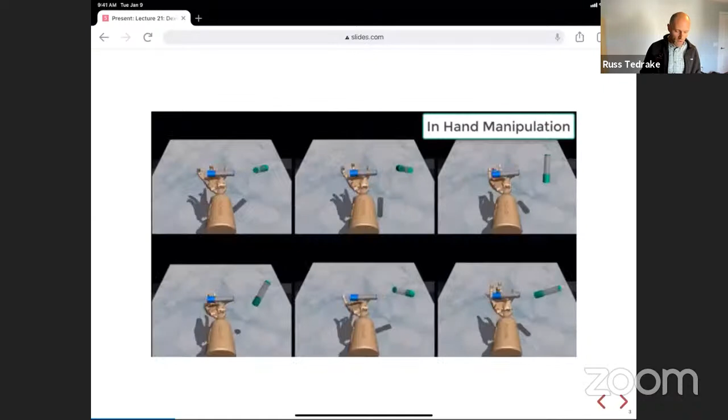This is the Adroit hand, from Mujoco. This is one of my favorite examples, where they're doing some pretty complicated tasks, like picking up the hammer. In this paper, they recommended a handful of these tasks as benchmark tasks for dexterous manipulation. I think the ability to simulate and control a full complicated dexterous hand is still an open problem. The fact that they can do as much as they did in this paper is absolutely awesome. But we still have a ways to go to make real robots that someone would actually choose to use a big, complicated dexterous hand on their robot. There are reasons you'd pay that price in complexity and cost if you could do more tasks, but we haven't completely solved the problem yet.

I like to put in some of the history, right, so it's not a new thing. This is Ken Salisbury, who did this I think just before he came to MIT, but this robot was upstairs at MIT for a long time when Ken was here. You should look at his biography, it's just awesome, the number of things he's done and been involved with, maybe after the lecture. But there's a link there that you could open up and set aside.

But this is, like, you just watch what this thing's doing. This is choreographed, of course, it's not solving the planning and control problem, but that's a hand from 1982 doing bottle twisting and everything, right? It's absolutely incredible. And if you were to look at the side view of the hand, it's got motors, a bank of motors off to the side, and it's cable driven. But just absolutely beautiful, stunning hardware. How many years ago? Almost 40 years ago, right? So it's hard to blame the hardware for why we haven't done better.

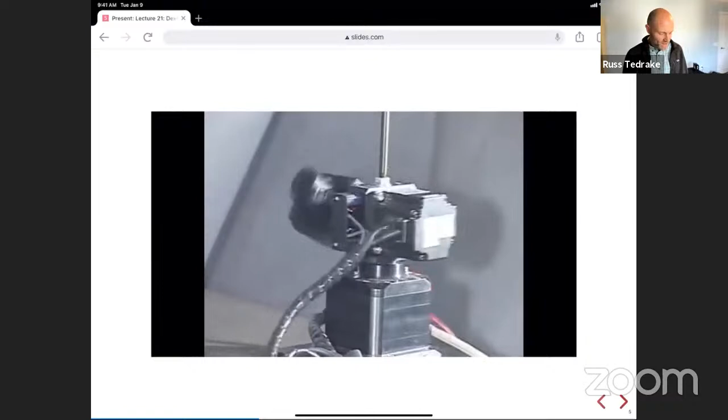I showed you this in one of the first lectures, but it's my favorite robot ever. This is the high-speed hand from Ishikawa. Whenever anybody at a conference asks me what's my favorite robot, and I have to put it on my name tag, I always pick this hand. It's just so incredibly good. What they do with this is a 3-fingered hand.

This is the same foveating tracking that I was talking about for Jean-Jacques' catching maneuver. It's got tactile sensors too.

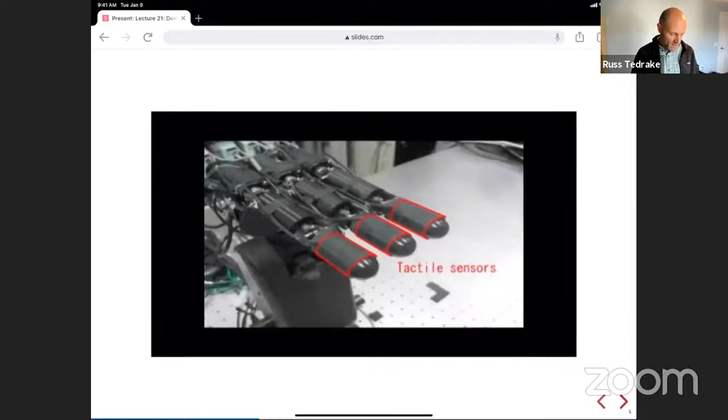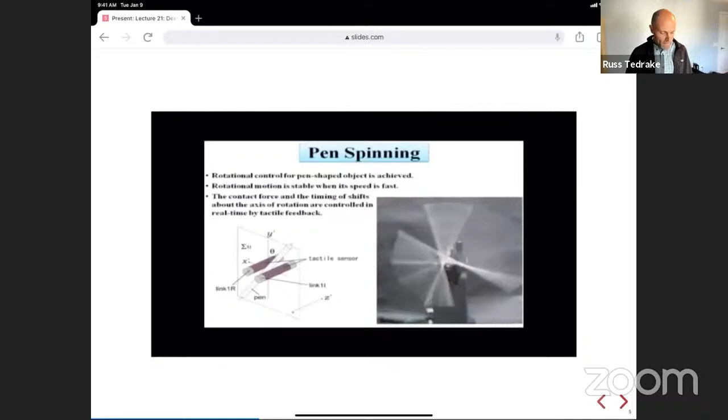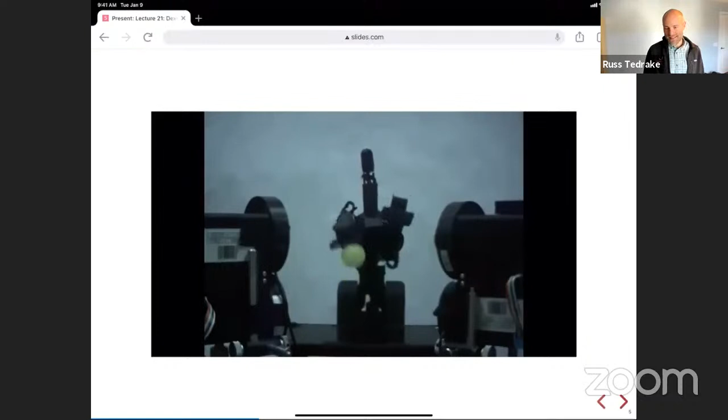But then it's just sort of ridiculous what they can do with this hand. Pen spinning - it doesn't last a super long time, but it's awesome. There's control issues to solve, but the hand is just awesome. It's overclocked. I think it would melt if you left it running too long, probably, but it's so good.

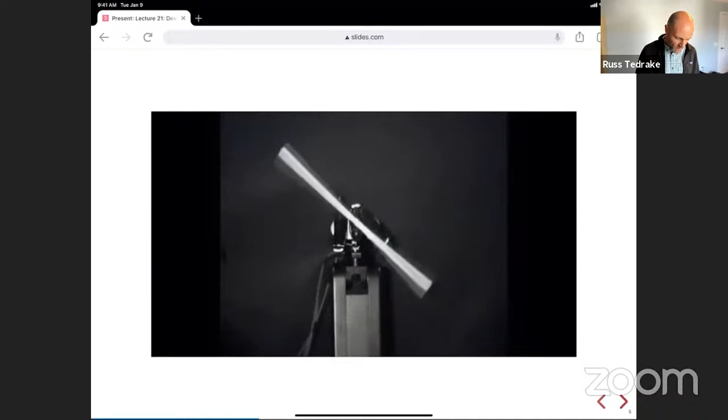And this was that hand solving the Rubik's Cube.

I would argue that the hardware is not the major limitation keeping us from having really dexterous robots using human-like hands to do complicated tasks. So what are some other possibilities? The cost and reliability of those hands, I think, is still a bottleneck.

So it's hard for everybody. Maybe if enough people had those hands in their living room and that was fine, then the field would be farther along. But the hands definitely exist.

Dexterous hands have turned into a pretty big motivation for reinforcement learning. It's been one of the key challenges in manipulation, to show that you can do something with a dexterous hand, because our more classical approaches haven't done a good job of solving that problem.

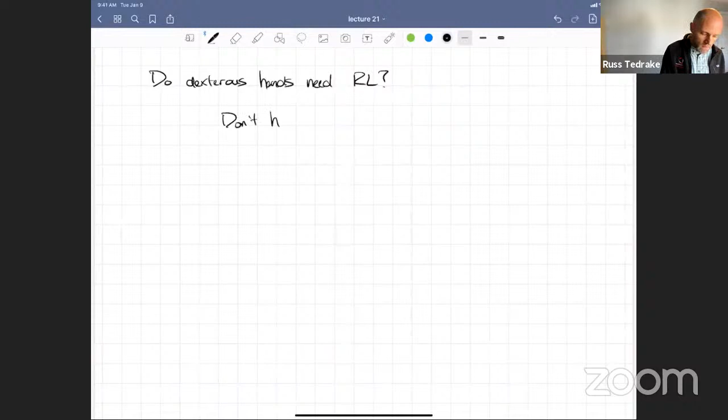The argument goes a few different ways, but one of the reasons people started doing this initially is they said the hand is just too complicated. The argument for reinforcement learning started with: we don't have good models. People said maybe for an arm it's okay, you'll get a reasonable model of the friction in the joints like we do for the iiwa, enough to do model-based control, but you're never going to be able to model all the stiction and complexity of a hand.

And those things at that scale would dominate the dynamics compared to the inertial effects, which are small relatively, and the friction effects are large. So that was one of the big arguments for why people said therefore you need reinforcement learning.

I think the bigger thing - I've said it enough that you know I think the bigger interaction that we don't understand is between the hand and the world, or the objects in the world. That's where there's lots of uncertainty. But I would actually argue that we have a pretty good model of the hands.

People also argue that just the complex contact scenarios are too hard to simulate. But I don't buy that.

First of all, many of the successful RL approaches have been in simulation. The OpenAI one was explicitly about saying that we trained in simulation and then we moved it to reality, where they closed the sim-to-real gap. In general, I think that the simulations are good enough. The big question is certainly whether they're accurate enough.

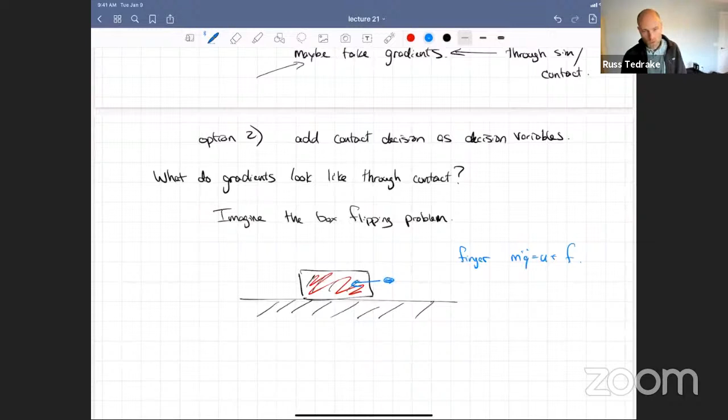Right, I like that one because it was my Cheez-It box, my blue finger applying a force here. Everything was reduced to a point finger. The equations of motion for the finger were simply m q double dot equals u plus my contact forces. The box has similarly simple dynamics, just in terms of its x position, z position, and orientation, okay?

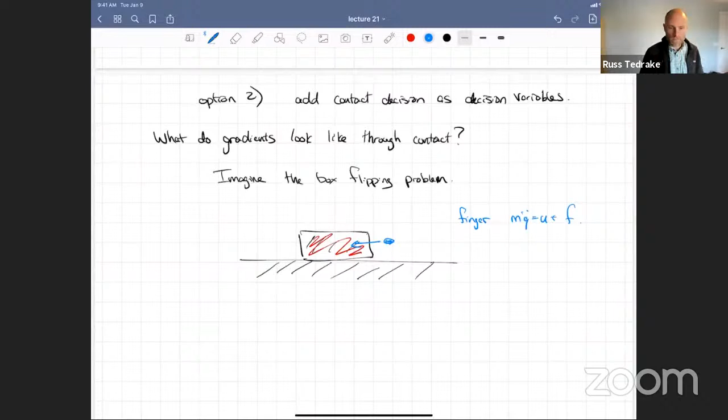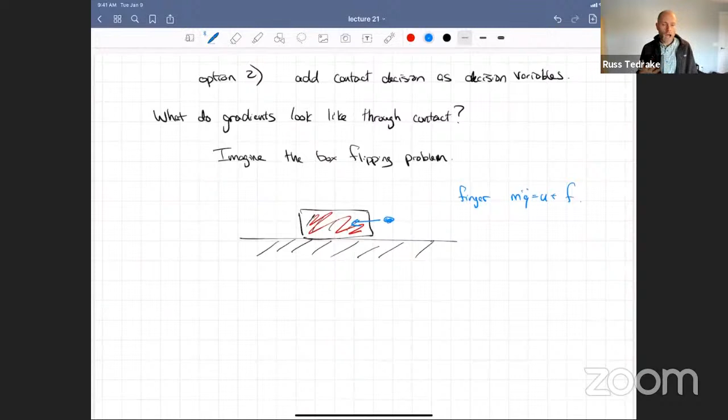What I want to think about is if I'm going to execute some trajectory with my finger, and I change that trajectory a little bit, how much does it matter if I change the initial conditions or the command over time? If I make an epsilon change to my command, do I get an epsilon change in my trajectory, and therefore my reward out? That's the fundamental question: how much discontinuity comes in, and is this contact going to break our gradient-based optimization?

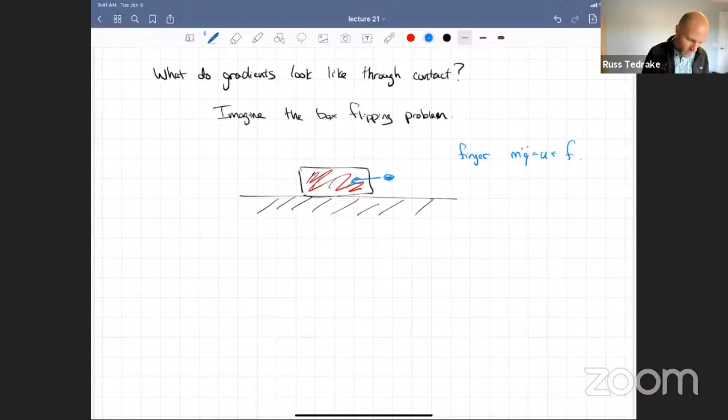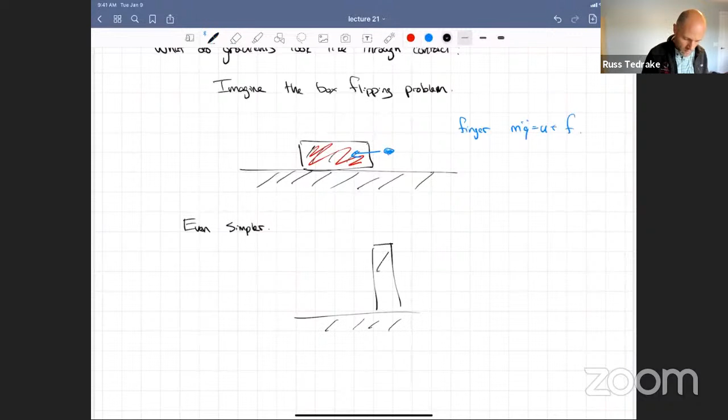Okay, so in fact I can go even simpler, I think. It's almost the same problem, but I want to zoom in on that initial point of contact. So let's think of it as throwing a ball at a wall, the classic contact problem. I'll take my blue ball and chuck it at the wall, okay?

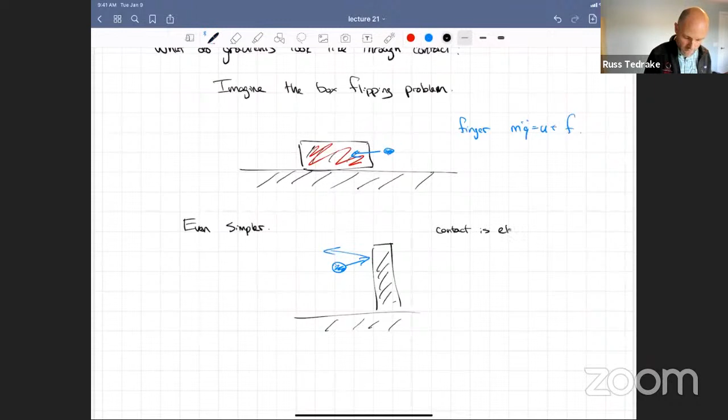I'll assume, for instance, to keep things simple, that the contact in this case is elastic. It'll bounce off the wall, not stick to it, so it's a rubber ball, not a putty ball. I'll assume frictionless contact, although that's not too much harder to add, but it just complicates my simple example here.

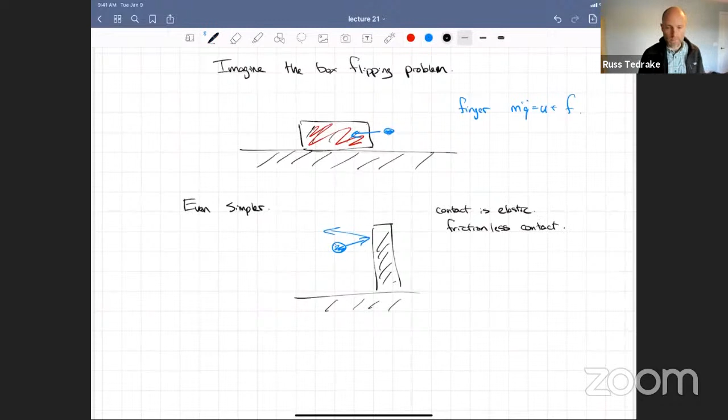The reason I like this throwing or smacking a puck example is that it's more ballistic, so I can reduce my control decisions down to just a few parameters. Let's say the only thing I get to choose is, I'll always throw the ball from the same location, but my control decision is my initial velocity. I'll call it x dot at time 0 and z dot at time 0.

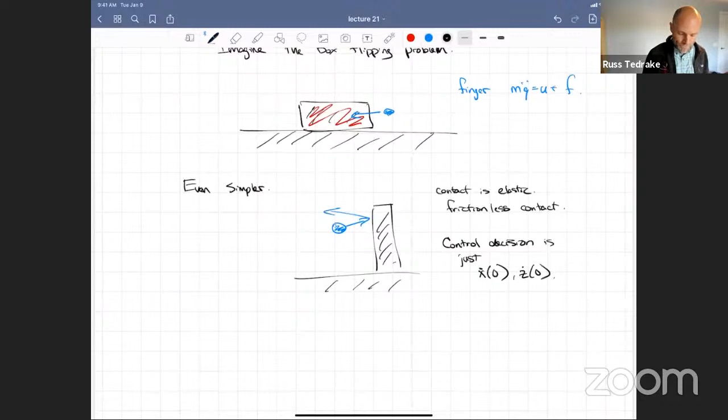The fundamental question I want to ask is, ultimately we're going to have some reward function that looks at the trajectory and tells me whether we're doing a good job. But let me keep it even simpler. Let's say the reward only depends on where x is at time 5, so it's a finite horizon problem. At time 5, I'd like the ball to be in some region, some target location.

Okay, so I think it captures a lot of the problems we're talking about. If we were to just say, what is partial x5 with respect to a change in the initial velocity? If I were to make an epsilon change in my only control decision, do I get a smooth change? What happens to my change in the position of the ball at time 5? Is that gradient well defined, continuous, or is it discontinuous?

So let's plot a few things here. First, let's plot x dot at time t, where x is my horizontal position, as a function of t. What is this thing going to look like? If this is my coordinate system, positive x here, positive z there, then if I start off with some initial velocity, there's no wind resistance, I'll proceed with constant velocity until the moment I hit the wall. Then I'll bounce off in the opposite direction. That's what x dot looks like.

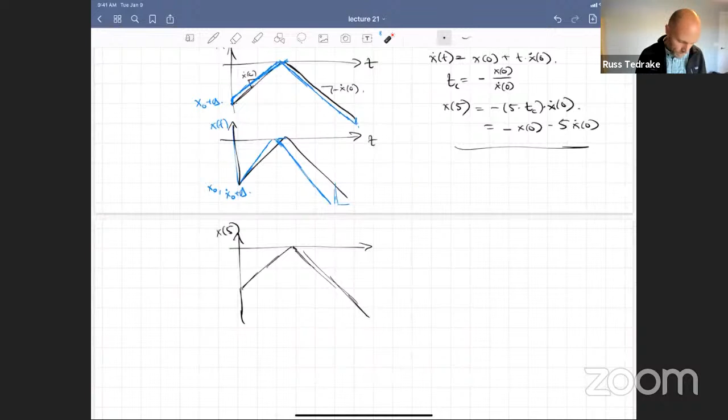This sort of thing is a complication, and it's even more apparent if you look at Z. If I were to plot the change, let me plot x5 as a function of x dot 0, and then if I were to change it as a function of z dot 0...

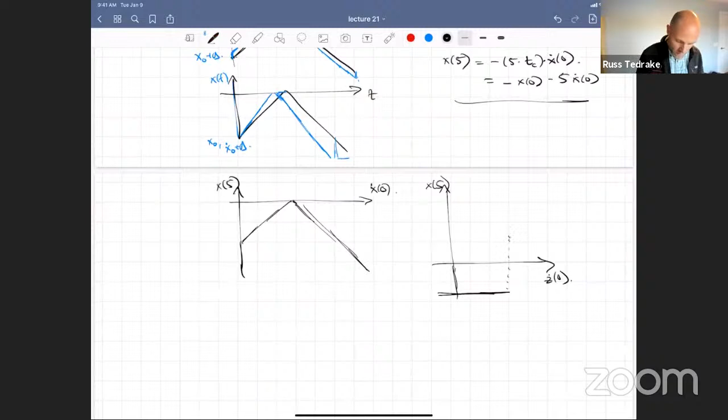That sounds like I'm dwelling on something obvious, but that is fundamentally the hard part of the contact problem—not that you make contact with an object, and not that the way you make contact is hard. The only real hardness, the fundamental complexity of contact, is whether you make contact or not. That causes massive discontinuities and rifts in the optimization, and it's hard. But just making contact is not hard.

There's a question on the chat by Antonia—I think I answered it at this point. Sorry I didn't see it soon enough, but yes, absolutely. The point is that the dynamics when you're in contact are simple. It's only making or breaking contact.

It's even more important than that. If I'm taking a gradient descent method, and my goal is to put the ball over here, let's say I have to start throwing the ball this way—I've got constraints, you can only use positive Z, I'm shooting a cannon pointed this way, I can tip it up and down. If my current trajectory is over here, and you're asking the optimizer to find the solution over here, there's nothing about the gradient information on this trajectory that tells it anything about what happens if I come down here—something fundamentally different happens and it'll move this way. That's, I think, the missing challenge.

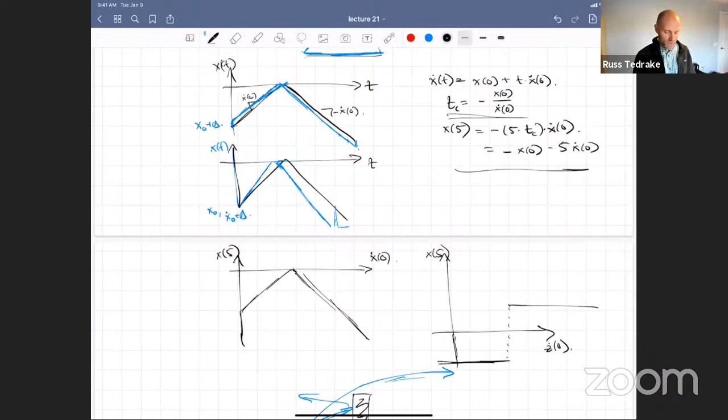For very simple models, we're actually able to solve for the time of collision with simple algebra. Then I could do the integral up to the time of collision because it's trivial, and write the solution in closed form. For simple robots, where we've seen lots of success of trajectory optimization through contact, we still often do that type of numerical work.

Even if we don't know where the contact is happening beforehand, if we haven't preordained it, we can simulate forward. If a contact happens—if I'm taking big discrete steps in my simulation and I can tell something happened between this time step and the next—there are good numerical recipes for backing up and finding the exact instant in time when that contact happened. You can do arbitrarily accurate simulation through contact.

Like the story we talk about in my under-actuated class, with simple robots, passive walkers and walking robots—this is what we do. We actually do careful event detection to solve for the time of collision, and then we can take exact gradients, saying how much the time of collision changed, how much that changes the integral coming up to the collision, and how much it changes the integral coming out. Everything is clean and good.

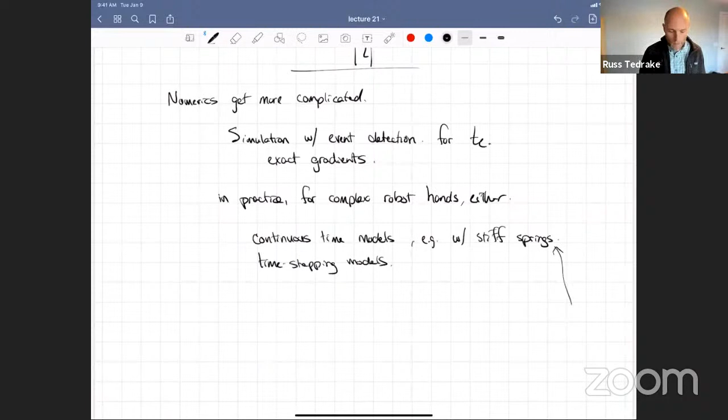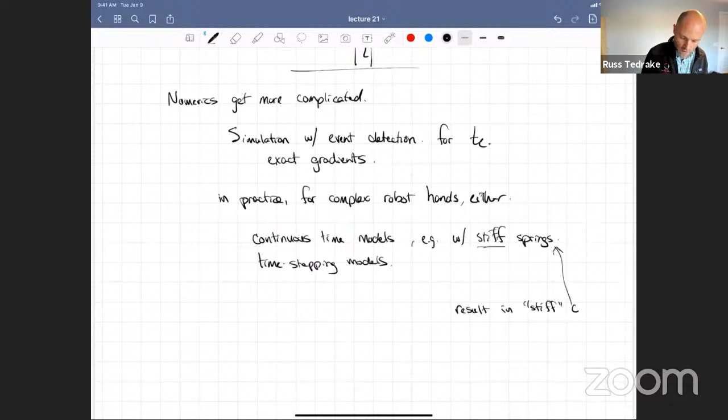But do people know what stiff differential equations are? It's not a coincidence that they use the same word, but these result in stiff differential equations, ordinary differential equations. A stiff ordinary differential equation is one where, there's a couple different ways people define it, but it's basically where there's a variety of different time constants underlying your dynamics.

Often it's even simultaneous. If you have some things that have a time constant which would ask you to make a very small simulation step, and other variables in your differential equation that would ask you to make a very big time step, then that becomes numerically challenging, because everything gets squished by your requirement to be very accurate on a few variables, even though you'd like to simulate in big steps. Similarly, if I have a robot moving through the air where I could take very big time steps, I then have to somehow take very, very small time steps.

That's the fundamental problem. At some point, in order to simulate a spring that is a reasonable stiffness for like the wall, I'm going to simulate a stiffness of 10,000 Newtons per meter or something like this, and that's going to require itty bitty time steps. And if you want to do itty bitty time steps in a trajectory optimization, then you need lots of decision variables along your trajectory, and taking gradients is going to take a long time. Simulation is going to take a long time, potentially, if you simulate accurately, and computing the gradients is even more expensive.

So, very expensive. And when you start cutting corners, dangerously inaccurate sims. Especially in getting the nominal solution out, you'll see high sensitivity.

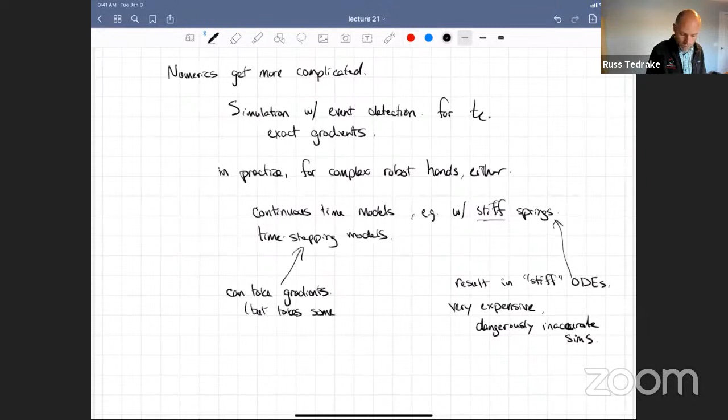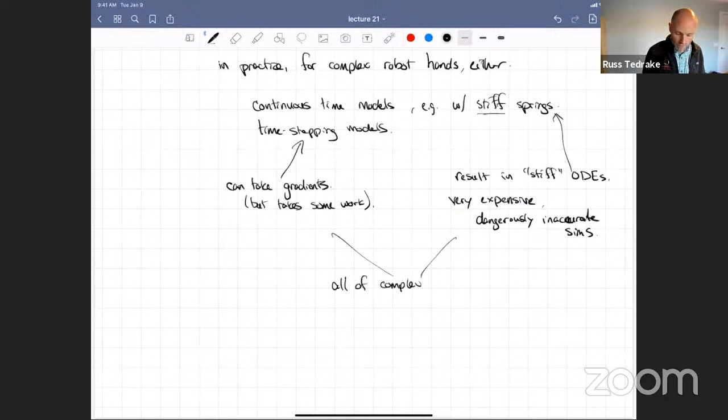And the other thing that happens in both of these models is that once you're simulating with any penetration, then all of the complexity of gradients of the surface normals comes in when you're in penetration. Do you remember that example we worked through before? Once you're in penetration, the normals are looking like this, and then they flip and move around. All the complexity of the collision engine gradients comes into your problem.

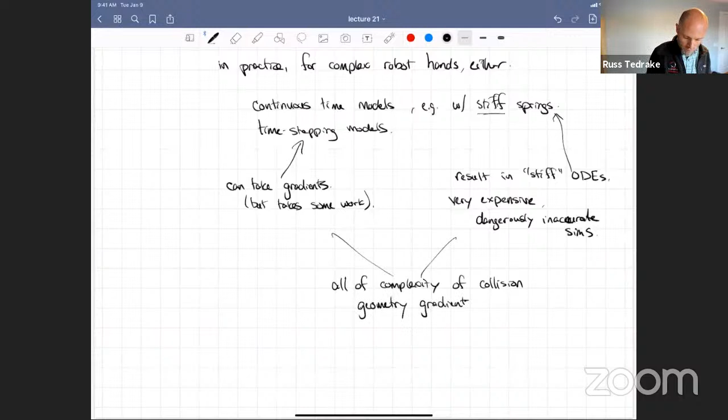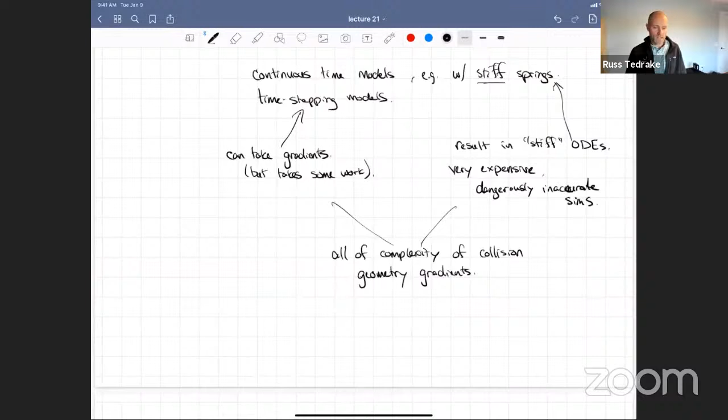And that's real, not like I'm saying, that's real if you're doing a 0th order RL type method, and that's real if you're trying to take real gradients. In practice, it's hard to simulate these things accurately enough that a very small change in the initial conditions gives you a very small change in the output, even though that's what the physics would tell you should happen.

So there's a couple sort of, I think, more fundamental approaches to getting around this. Let me talk about a few of them. Okay, so how do we?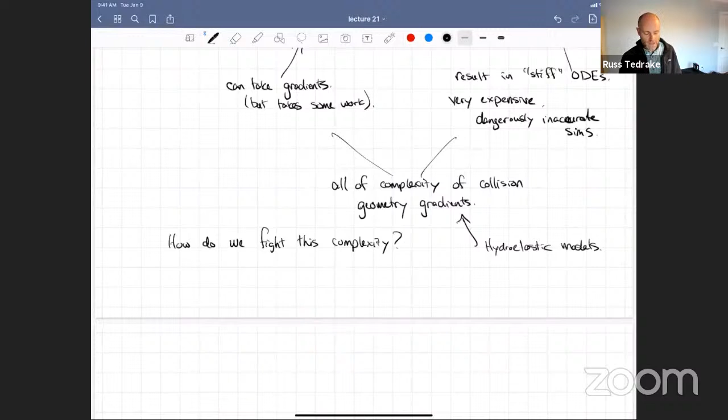The complexity of the collision engine is one of the things we're trying to address. We try to use these hydroelastic models I've shown you before, a fundamental approach to improving the numerics of dealing with contact when you have penetration. Instead of point contact on point contact, you have volume contact on volume contact, mesh on mesh, taking a surface integral. Much more complicated operation, but it fundamentally addresses some of the challenges of the collision geometry gradients.

Okay, so that's one part. There's another thing, this is maybe an aside, a rant if you will. I'm getting older, I have too many rants now. So a lot of people say, I'm going to take my ugly simulator, right?

It's got maybe bad gradients, or I can't get the gradients out of it, and I'm going to generate a bunch of trajectories. I'm going to fit it with a deep neural network, and now I've got a good model, and the network's going to protect me from this. I don't see the logic in that. I just don't see how that makes it better.

I mean, I think it is convenient to ask PyTorch for gradients, there's no doubt about that. But if your simulator is not giving you consistent, accurate results, fitting it with a function approximator—if it's a good function approximator—will give you the same bad results as the simulator. I just don't see any story where that makes the problem better, right?

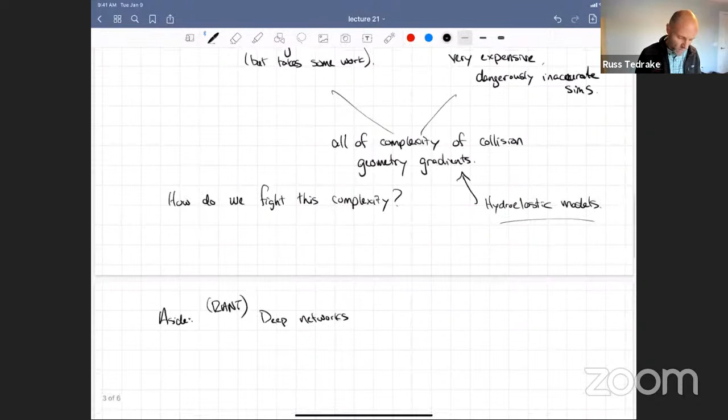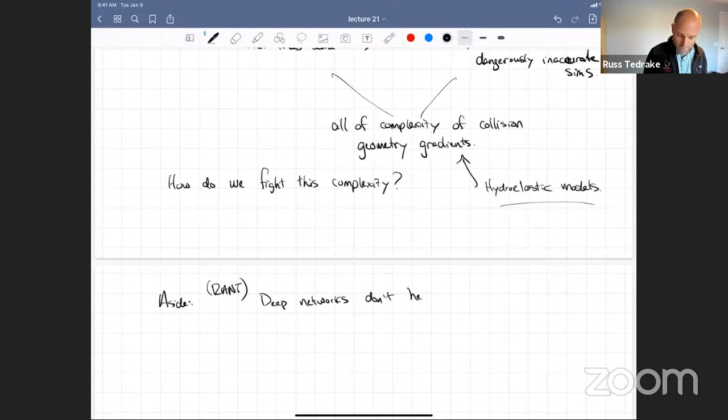In my mind, maybe if it's just really about using PyTorch and not having to write the gradients directly, then I guess that would be okay. But I think you're only incurring complexity and uncertainty when you could just write the gradients. Sorry to those people out there that are doing that.

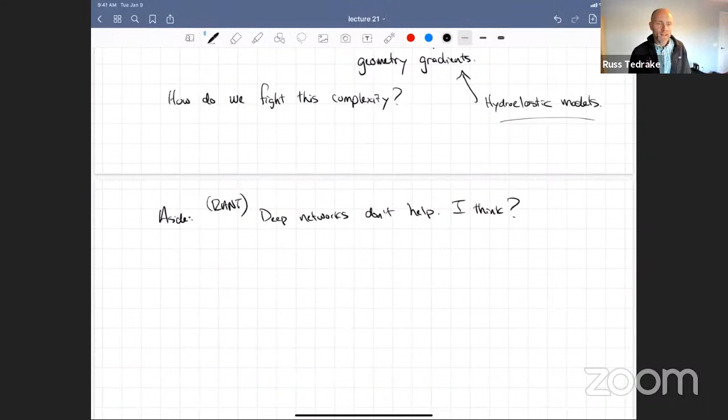Okay, so there is a fundamental approach, and I think RL nails this one: to change the objective.

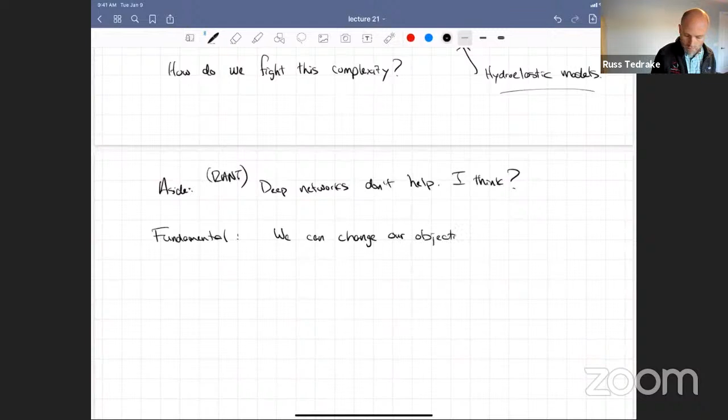So far, when I've been talking about motion planning, we've been talking about minimizing our long-term cost—something where, maybe we've been optimizing Q dot instead of thinking of it as U, but we've been thinking about this sort of objective. To be super clear, this is some running cost where I have a sum over N. Those have been the objectives.

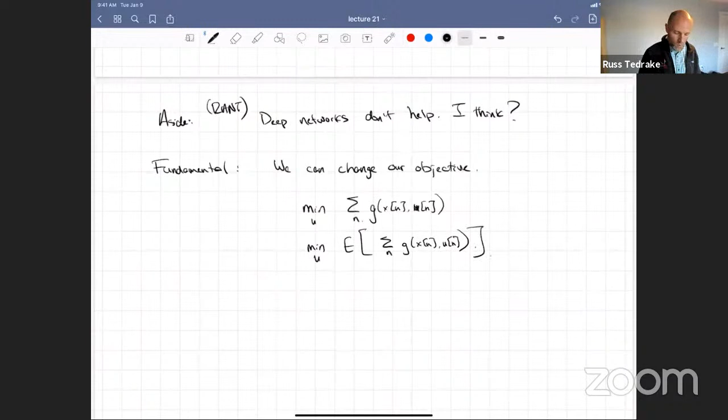But in RL, we change to a stochastic optimization, where this is the expected value taken over, let's say, initial conditions, over maybe the size of the box, inertias—right? You can put zebra texture maps, people do all kinds of stuff, right?

RL isn't the first to do this. We've known about stochastic trajectory optimization forever, but I think people didn't push it hard enough, and RL did. Right, so now, if I have my nominal velocity, let's say, but I actually have a distribution of initial conditions—let me draw the level sets of a distribution by saying somehow I'm in some set of initial conditions here. There's uncertainty about my initial conditions.

Then what's happening here is I'm going to send—let me make my wall a little taller—okay, so I'm not going to send just one trajectory over. If I'm sampling this, I can actually think about it as sending sort of like a volley of trajectories over, right? And the amazing thing is each one of those is well behaved or whatever, but some of them are going to go over, some of them are not.

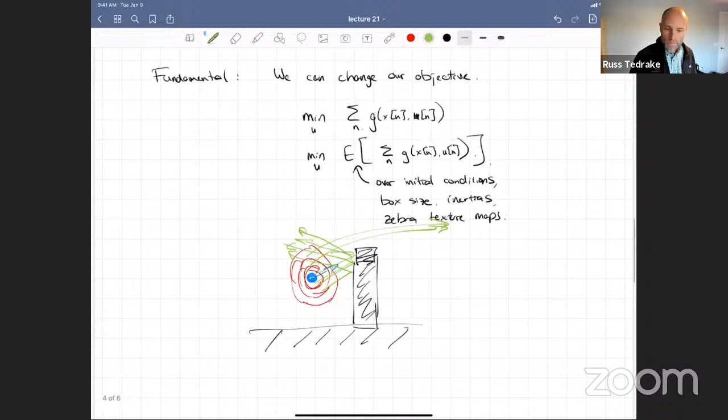And if there's a Gaussian that has an infinite tail, for instance, then it really does mean that even when I'm in this case where I'm shooting over the wall, if my nominal trajectory somehow is shooting over the wall, but I've got enough randomness and expected value computations, then the tail of my distribution is still telling me there's something happening down here, and my gradient tells me that I should move down in order to make contact, in order to pull this way.

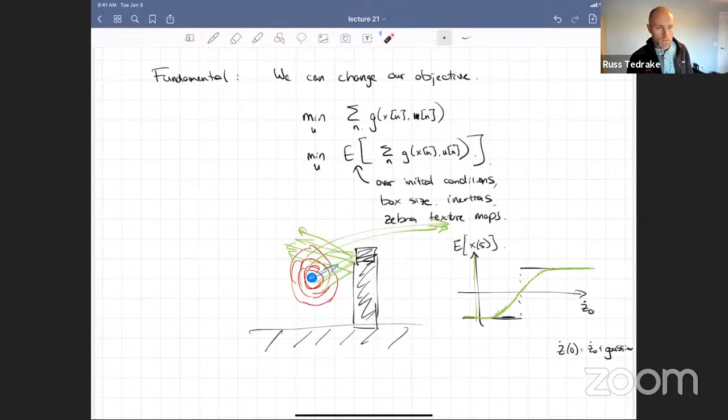If you remember one thing from the lecture, I want you to understand that.

I think we've known that stochastic trajectory optimization is like a better objective in some sense for a long time, but I think RL is the community that sort of embraced using Monte Carlo approaches to this. There's someone out there who does stochastic trajectory optimization with Monte Carlo for 40 years, and they won't like me saying that, but I would say the massive trend happened, where using massive Monte Carlo simulation to approximate those expected values, because computing the expected values through contact in a closed form way is hard.

So if we look, for instance, at the OpenAI Dexterous hand, right? I think people know this, but I actually really like the paper and the work. I think they threw compute at it big time, and they're perfectly honest about it. They basically had the simulator twiddle its fingers for the equivalent of 13,000 years. That's a big AWS bill, or whoever's paying the bill there. That's a lot of compute. Raise the temperature of the earth a few degrees or something, but it worked, right? And it solves a problem that we weren't solving before.

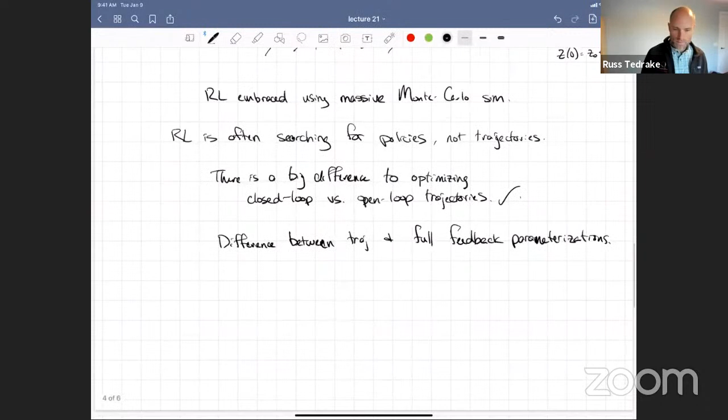The other big approach is to tell the optimizer about the discontinuities. If my optimizer is currently considering trajectories like this, you'd like to give it more information—a couple different ways to let it know that you could have hit the wall if you'd chosen something slightly different, even though you're considering this trajectory right now. Let me show one way to do that.

That way is to add contact forces as a decision variable. I know at least one group is working on some results from a paper by Mike Posa in 2014 that does this.

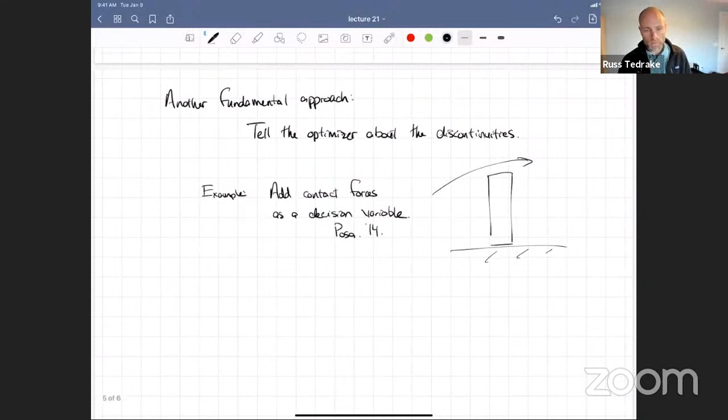The way you would do that is you'd effectively write the dynamics as your constraints between the sample points. But in order to tell the solver that you can make contact or don't have to make contact, you add forces as a decision variable, and then you add complementarity constraints. These basically say that your contact force has got to be greater than or equal to 0, and my contact distance has got to be greater than or equal to 0. Then one extra constraint saying force times distance equals 0, which you could read as saying force equals 0 or distance equals 0.

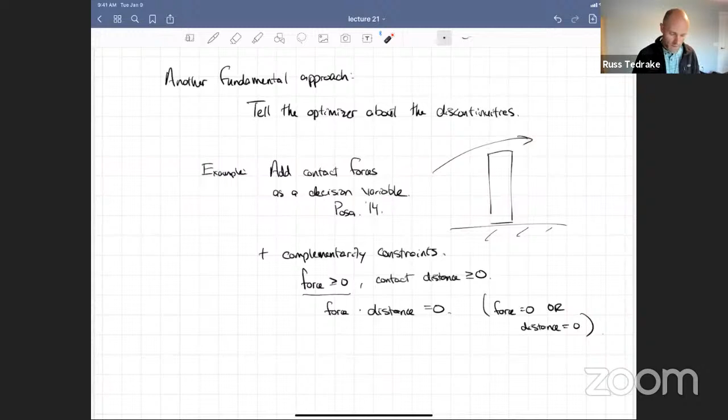By moving your time stepping algorithm into the optimization, into the constraints that bind the different points together, and making force an explicit variable, the optimizer, in order to satisfy the dynamic constraints, has to set those forces equal to 0 in this case. But there's a gradient—it knows that if the force were to go up, it could move the trajectory this way, and to pull the force up, the distance needs to go down. There's a signal that would allow it to understand it could pull itself into contact in order to go back. There still could be awful local minima, but at least the information is provided to the solver in this potentially hard way. In fact, it's a really nasty constraint.

If you think about what that constraint looks like as an optimization problem, with force and distance—I'll write phi of q as my distance here, or just distance—this is not a good constraint to hand an optimizer. It looks like this: I'm either on this axis or I'm on this axis, coupled so it's in the positive quadrant. We like convex constraints, where if I have 2 points in my constraint set, the line between them is also in the set. This is the worst form of that.

So there's a couple ways we work on making that better for the solver. We can relax the constraint. This complementarity constraint is bad, but we can relax it.

There's a few ways you might choose to do it, but one way we do it is something like this: we say, for instance, that force times distance is less than or equal to some smallish number. Maybe it's not so small to begin with, and we let the solver find a solution, then we make this parameter smaller and smaller, so the approximation gets tighter and tighter until, in the limit, it becomes this.

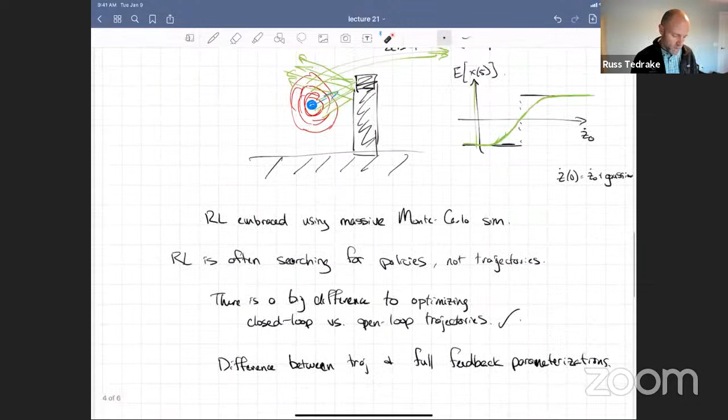I don't want to say a lot more about that, but please ask questions if you have them. So does that level of understanding provide some insight? The fundamental problem is not contact with the object, it's when you change contacts. I think the two fundamental approaches I've told you so far are: go stochastic, or somehow tell the optimizer about the discontinuities. Those then can allow you to solve the problem we didn't solve before, which is to allow the solver to determine when you're in contact and when you're not.

So I think robot hands will get better, but they're not the bottleneck, not right now. Maybe their cost and reliability makes it so—if everybody had one, would things be better? Probably. So maybe there's a bottleneck there, but if you have all the tools and want to get it done and can afford a robot hand, the robot hands aren't stopping you, I think. Simulation will also get better, but I don't think sim-to-real is the bottleneck on the hand part—maybe on understanding all the different things the hand has to interact with. But I think we fundamentally need more progress on planning and control through contact.

If the changes in parameters do not make or break new contact, gradients should be well behaved—you just have to be careful with your numerics. But for making and breaking contact, you need either stochastic optimization or contact-implicit methods, mixed integer being a form of contact implicit.

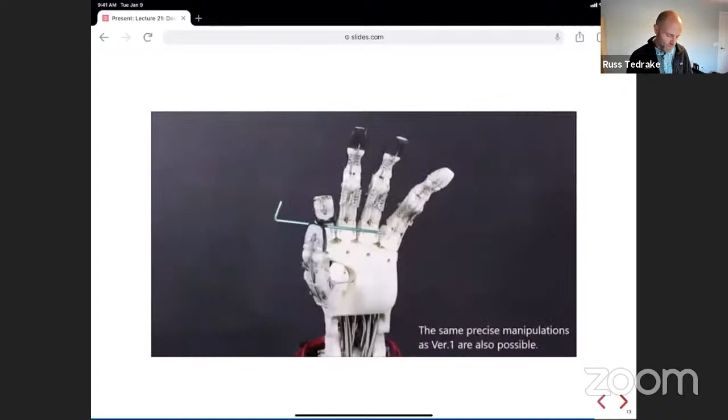Let me end with a little optimism: there are good hands out there already, but they just keep coming and they look so good. And I said the robustness might be an issue, but people are really hammering on robustness. I think in a minute they will actually take a hammer—I didn't mean that as a joke, but they can do pretty complicated things, and yeah, I think they're really getting much more impressive in terms of robustness.

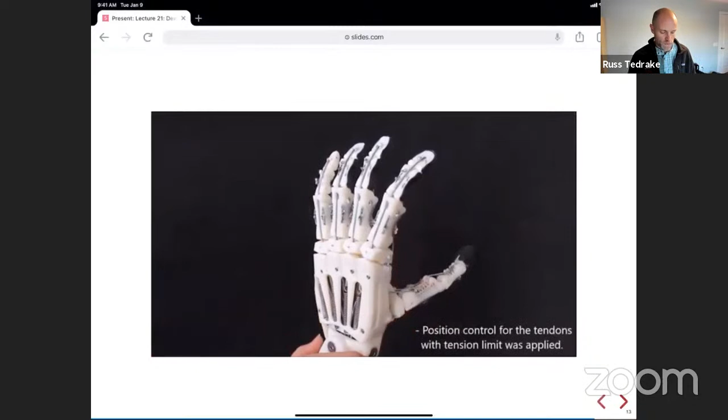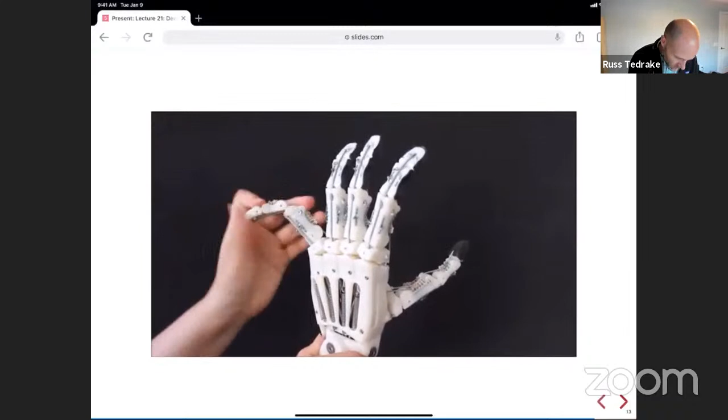Now, oftentimes I haven't found a paper on this yet, or maybe I just haven't read it. But it looks like there's not a lot of proprioception in the hand yet, and that's another thing you would add. There's the hammer - that would add more complexity and challenge robustness. But I think there's every reason to be optimistic.

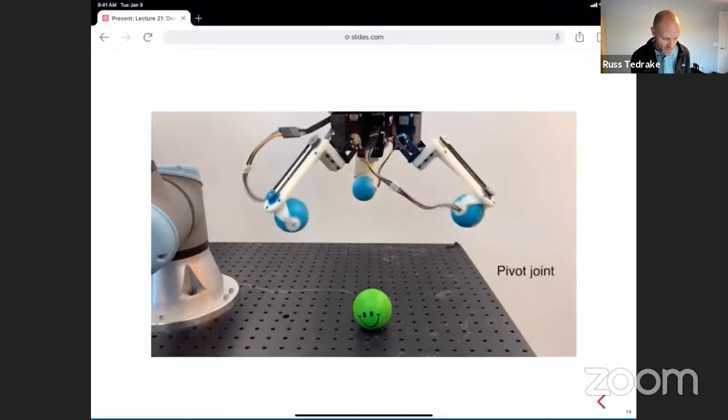If you want more dexterous hands, you should build them, or just wait a little while and someone will build some awesome ones. I also think we shouldn't be obsessed with the human hand. There are all kinds of clever ideas waiting to be discovered of slightly different hands that are going to do awesome things. This one, the new degree of freedom, is just a roller on the fingertips.

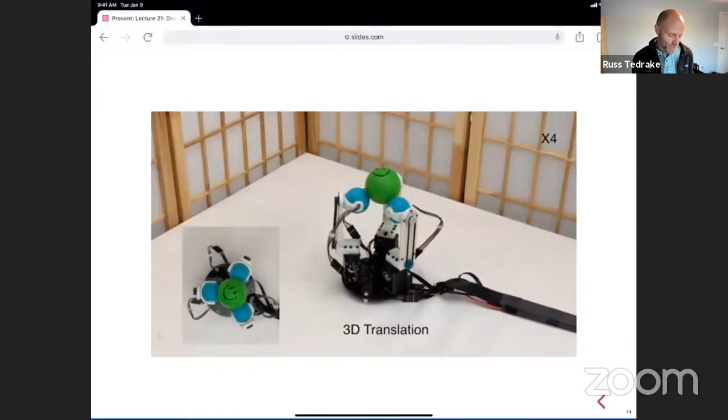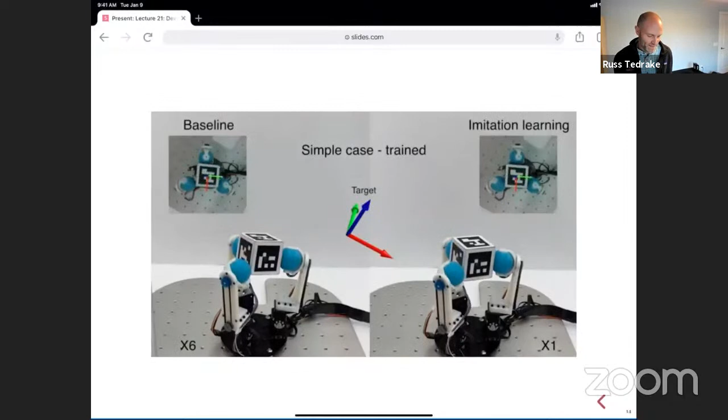And it's such a good idea. I've heard people talking about this for years, but I'd never seen it until recently with Mark - no wait, this is Ken Salisbury again, same one who did the one in 1982. It's good. It's beautiful. You can watch what it does, and it's really good.

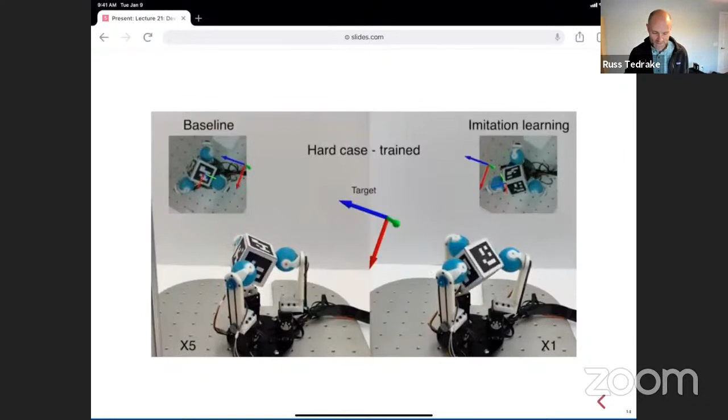So be creative. Suction's okay - use suction if you need to. Use widget fingers, whatever you need. It's a hard problem.

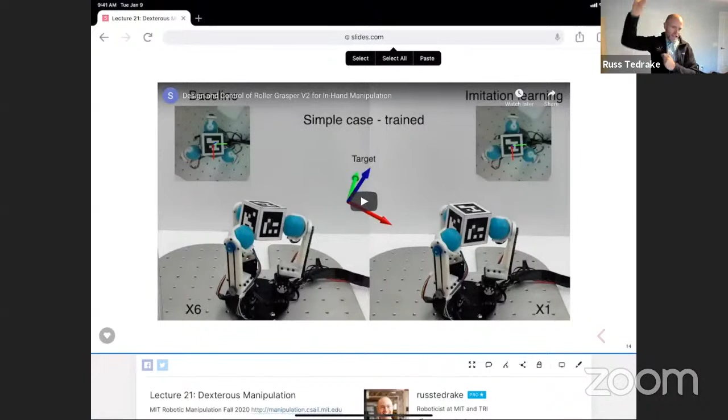So are you saying that in order to hit a position that's maybe behind your initial position, you could either throw it backward or throw it really hard against the wall such that it goes behind you? But let's say you can't actually throw it backwards—if that were a solution, then maybe finding it would be easy. But locally it's just telling me I should throw it less, because then my ball at time 5 will be closer to the goal. And all the local gradient information is just going to bring you to 0 and then get stuck. When really what you needed to do was slam it against the wall and go the other way. Okay, that makes sense.

Can I ask a small implementation question? It's kind of dumb, but when I take the expected gradient of the expected value of my reward, it's true that my distribution is kind of messed up in that example, right? So I need to keep track of a bimodal distribution, some of which goes over the wall, some of which doesn't. That's why people just do Monte Carlo approximations of that expected value—if you're really taking a sum over lots of trajectories for that expected value, then the gradient is trivial: you just take the gradient of each of them independently and sum those. But actually keeping track of the distributions and writing the expected value correctly is very hard.

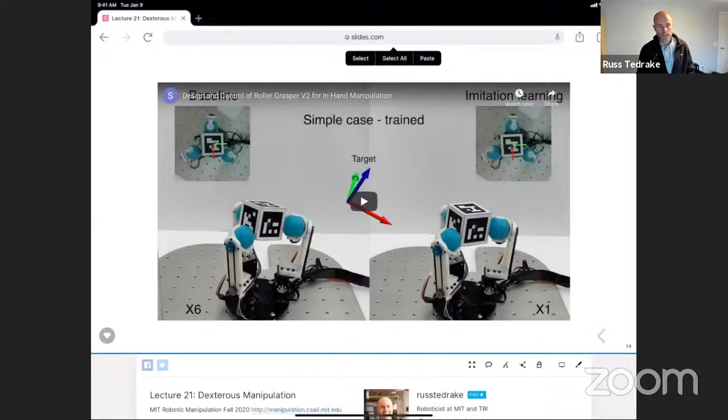I just couldn't work out the math in my head—it would help a lot. We've tried; we've had cases where we used sums of squares to track level sets of the probability distribution through contact, watching that multimodal behavior tracked with a conservative outer bound. I'd love for that to go farther, but it's numerically hard to track those things, and it's still an outer approximation, or you choose your approximation—there's also the occupation measures view of the world.